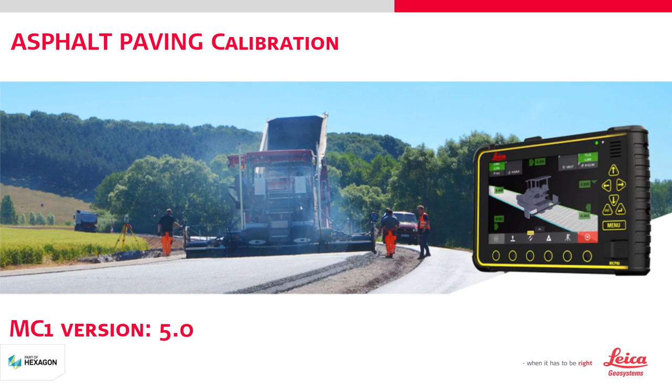To achieve the highest precision, we recommend you calibrate your MC1 solution every time you have moved the machine to a new job site or when you pave a new layer thickness.

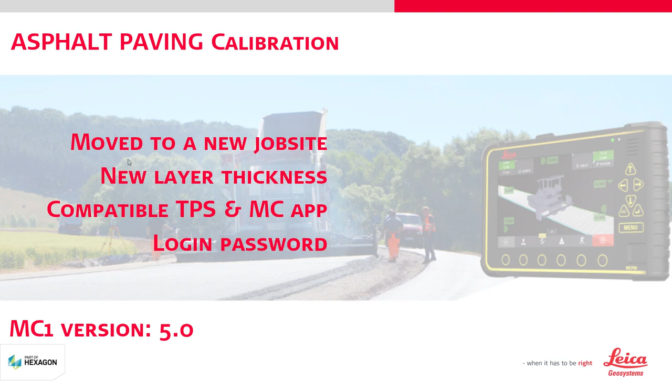You need the following tools to complete this task: a compatible total station with the MC app, and the login password. You may need to ask your local selling unit how to get this password.

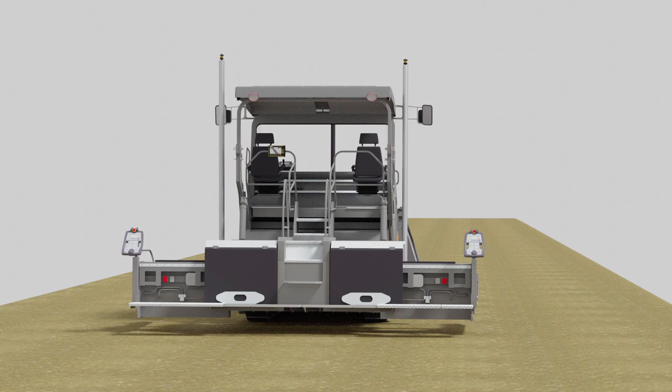Let's get started. You need to place the machine on a hard and flat surface. We recommend doing it on-site so that the machine and masts stay assembled during transport between the calibration and production site.

We recommend contracting the hydraulic screed extensions to the minimum width. This is of course only valid for hydraulic extensions and not for fixed width extensions.

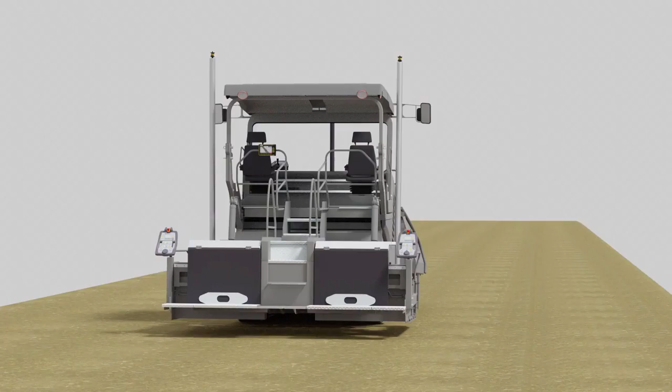Now, take wooden blocks with the same height as the thickness of the layer you plan to pave. Please remember to include the compaction effect when you calculate the height.

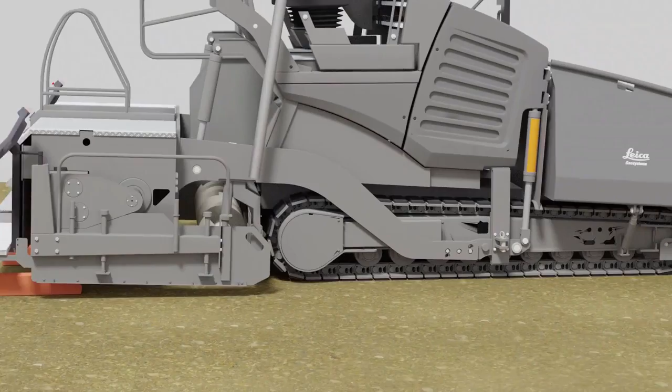Place these blocks under the screed. It is important now to get the crew to adjust the cylinders in front of the tow arms to set the angle of attack according to the desired paving thickness.

When you have positioned the screed precisely as it will be under production, you can adjust the masts into a vertical position. You can use a spirit level for this.

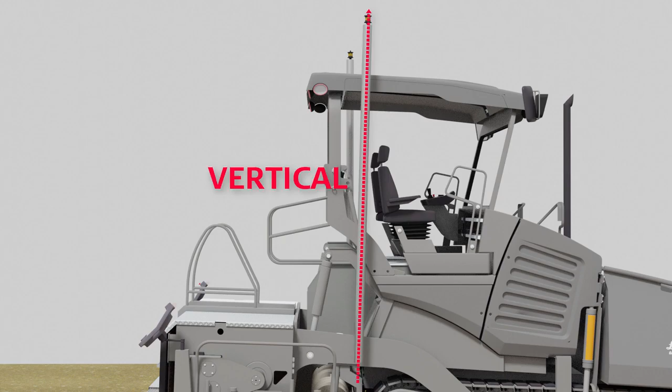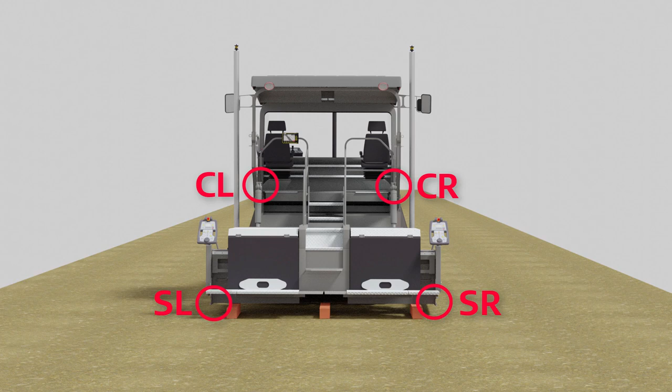You need to measure 6 points on the rear of the screed: screed left, screed right, cylinder left, cylinder right, left mast, right mast.

Let's have a closer look. For SL and SR, it is important to aim the total station at the very lowest spot on the corner of the screed. Select the prism type reflectorless.

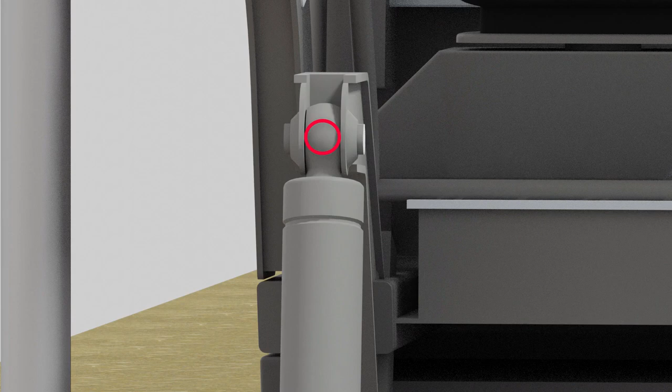For CL and CR, we recommend you aim for the center of the joint. Select prism type reflectorless.

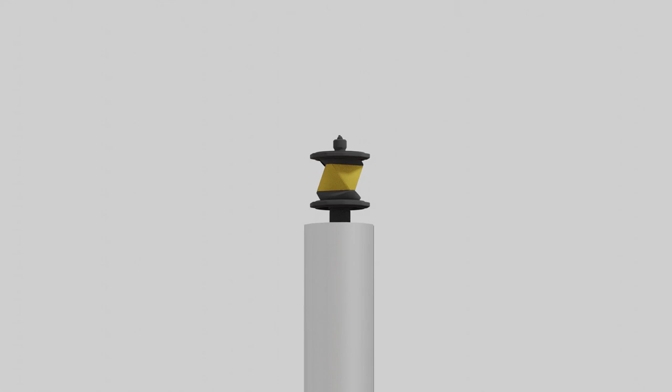For LM and RM, set the prism type to MPR122 and let the total station lock to it.

Let's bring in the total station. In this example, we are using an iCR80. Position it approximately 10 meters behind the paver with a clear line of sight to all 6 points.

Important: for this job, you only need to level the total station to get relative position on the target, so there is no need to set up in local or job site coordinates.

When the Bluetooth antenna is in the upright position and you have leveled the total station, turn it on and press the MC app.

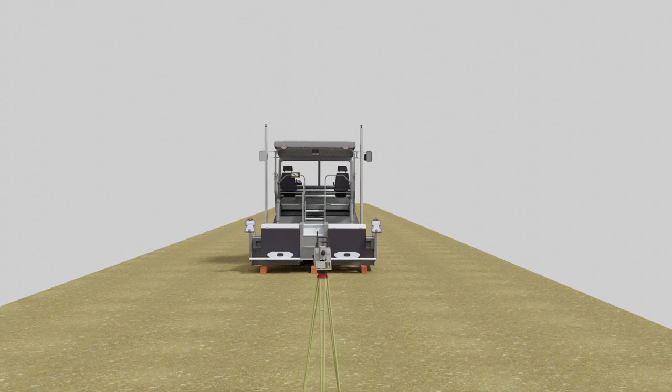Now, go to the machine control panel. Here we will create a machine profile. Note, you only need to create a machine profile for the very first calibration of the machine.

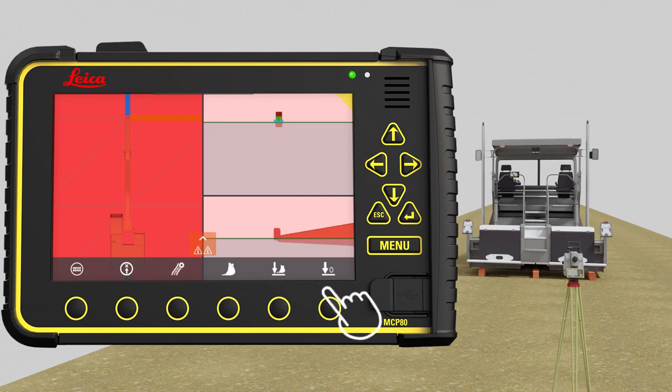We start in the Run screen. Press Main menu. Press Machines. Press New. In machine type, select Asphalt Paver.

In this exercise, we use Vögele 2100-3 with Navitronic Plus. In machine brand, select Vögele. In machine model, select 2100-3.

Navitronic is pre-selected. In this exercise, we leave the machine name as default. Press the flag to save and store. Press OK. You can see the menu structure is now slightly different.

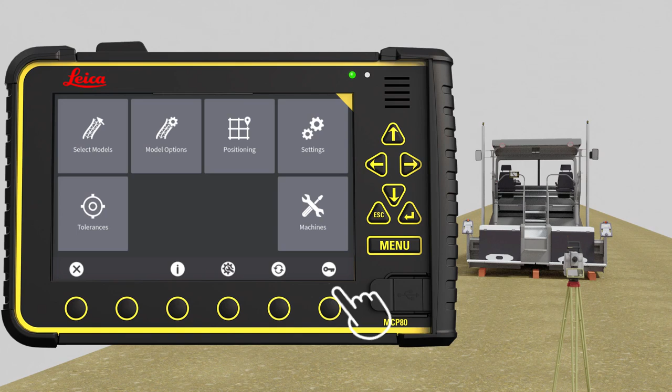Before you can calibrate, you need to pair the panel and the total station. Press Positioning. Open the Total Stations menu.

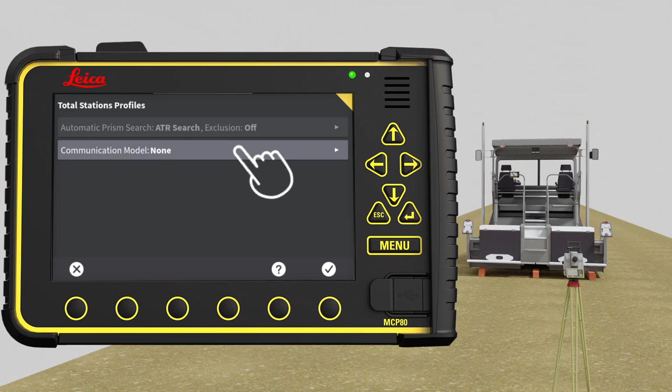Press Communication Model. In this exercise, we select the CR30S modem. Press OK. Press New.

When scanning has completed, select the total station. Go to the next page.

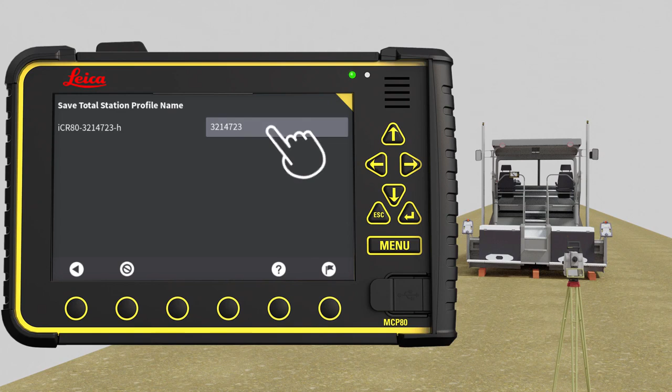We recommend to always name your total stations and to use color codes for the names. It is then easier to distinguish total stations marked by colors from a long distance. Here we name it blue.

Press the flag to save and store. Press OK to finish.

Press the X to go to the Run screen. Press Main menu. Press Machines. Select the paver.

As you see, the machine status is uncalibrated. Press Calibrate.

It is important that your slope sensor arrangement is correct and your machine is on a hard and flat surface and will not move before you have finished. Go to next page.

Select Measure with Machine Calibration. Go to next page. For this exercise, we select 2 masts.

Go to next page. Because we are calibrating a dual mast machine, both masts are active and therefore we select both masts in slope sensor arrangement.

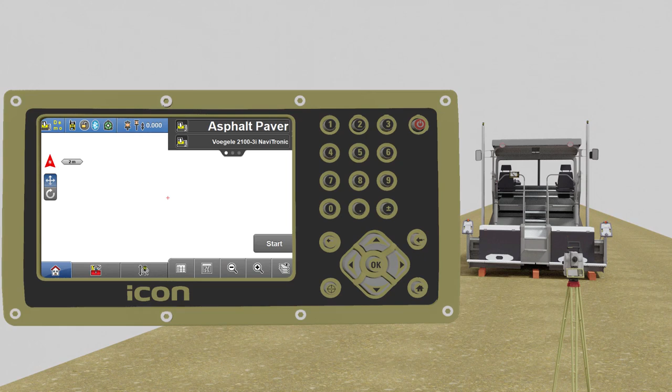Go to next page. You do the rest of the calibration on the total station. On the total station, you are in the MC App.

Press on the toolbox. Select Machine Dimensions. Important, select Reflectorless as prism type.

We recommend turning laser on to make it easier to see where you aim on the screed. Now manually aim your total station at screed left and press Measure.

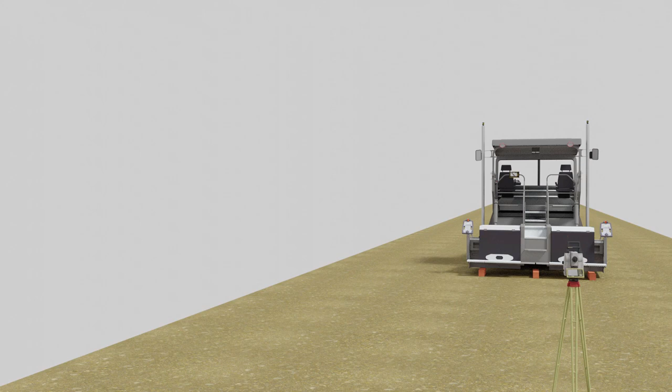If you have any doubt about what to measure next, please look at the machine control panel. The panel will guide you with pictures and updates every time you measure a new point.

Manually aim your total station at screed right and press Measure.

Manually aim your total station at cylinder left and press Measure. Manually aim your total station at cylinder right and press Measure.

Go to the next step to measure the masts. Select MPR 122 as the prism type.

Make sure you turn off the laser before you proceed. Manually aim the total station at left mast and press Measure. The total station will automatically lock on the prism before measuring.

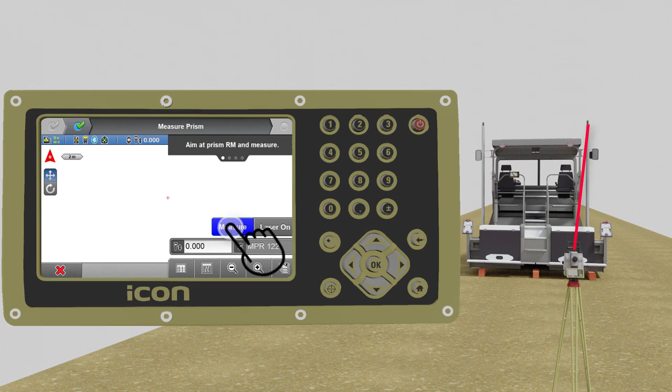Manually aim the total station at right mast and press Measure. The total station will automatically lock on the prism before measuring.

You have now completed all the measurements. Go to next step.

We will finish the procedure on the MCP80 panel on the machine. On the machine's control panel, go to next page.

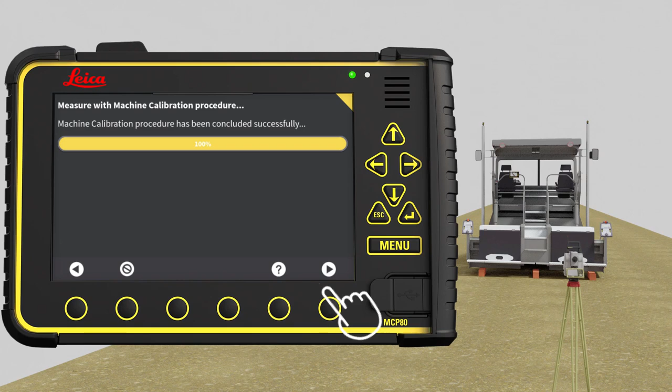Here you can see all of our dimensions. Note: these dimensions shown here are from a simulator and not from a real machine.

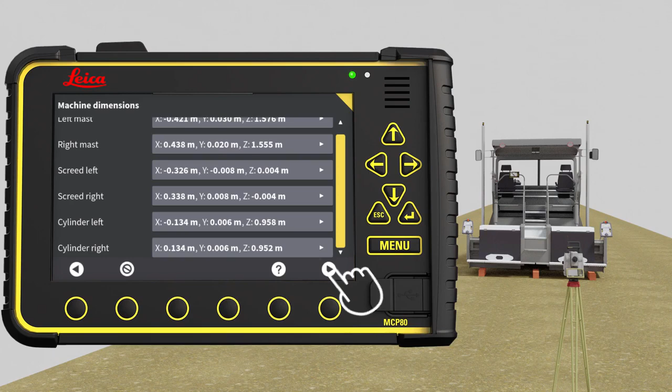Go to next page. Put a check mark in the Reset Mast Slope Sensors to 0%. Press the flag to save and store.

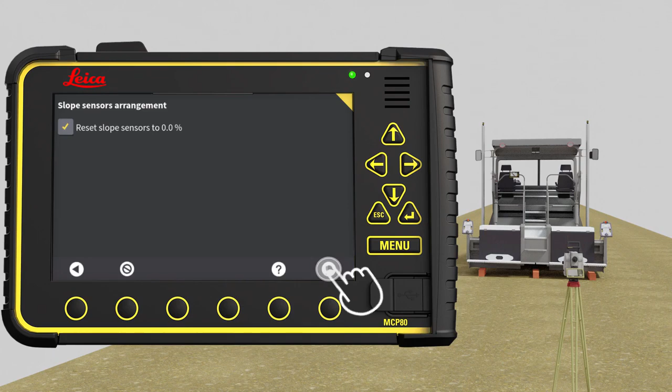Press OK. The status will now display the timestamp of the latest calibration of this machine.

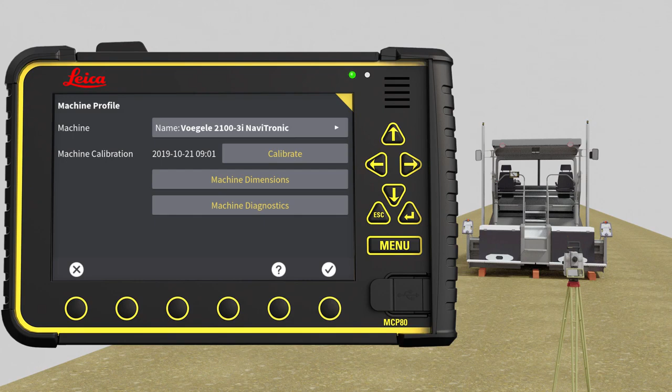That's it. You have now learned how to calibrate your MC1 Asphalt Paver and are ready to import a design file and go paving.